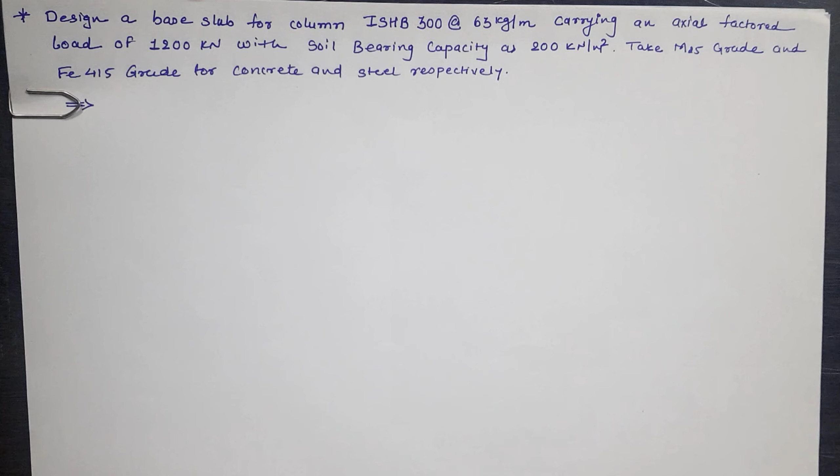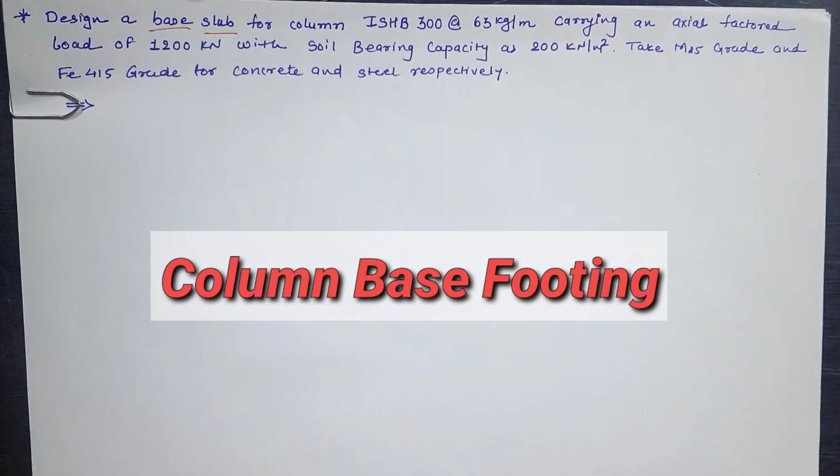Myself Ethan Kenny, and today we are going to learn about base slab footing for given Indian standard heavy beam 300. We have given axial factored load as 1200 kilonewton and SBC of soil, it means soil bearing capacity, as 200 kilonewton per meter square.

Another part is given as the grade of the concrete as M25 as well as grade of the steel as Fe415. So first of all, what is the base slab?

Generally we are going to use the concrete footing for any types of structure. So the footing is of concrete. We have given Indian standard heavy beam 300 as a column. It means that our column is of steel.

So we cannot directly connect this steel material with the concrete via welding or bolted, and for connection of this steel column to the footing, we have to apply base plate of steel material to the concrete, and this base plate is directly connected to concrete via anchor bolt all around the periphery.

So that base plate is directly connected to the concrete footing, and the steel section, or we can say that the column, is connected to this base plate via welding or bolted. So this is known as the column base footing.

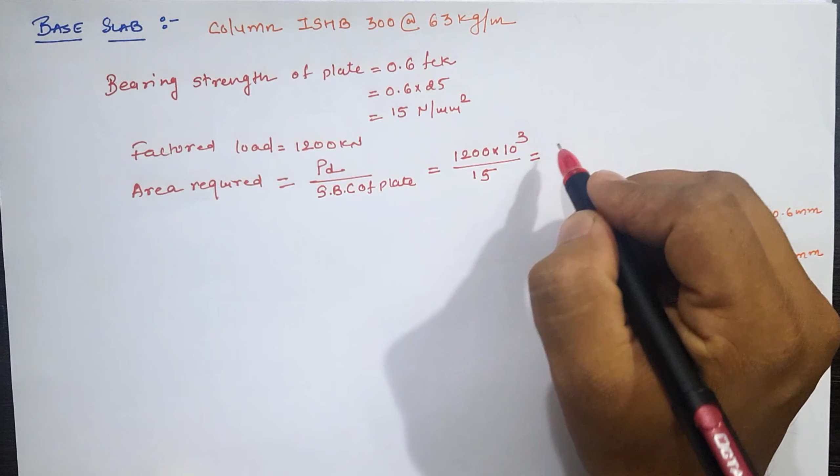Now we have given 1200 kilonewton as a design load. In terms of Newton, it is 1200 into 10 raised to 3, and bearing strength, it means safe bearing capacity of plate, which is equal to 15. It is 80,000 mm square. So we have to provide the base plate having minimum area as 80,000 mm square.

Now we know that our plan view of the Indian standard heavy beam section is width as 250 and depth as 300. So we can provide 250 by 300 mm as a base plate, but if we calculate the area, then 250 cross 300 is less than 80,000 mm square. So we have to increase the dimension.

So let us assume 50 mm as a projection all over the periphery of the section. Hence the width of plate, B of plate, is equal to our base width of the flange BF plus 2 times our assumed projection, which we have assumed as 50 mm. So width of flange is equal to 250 plus 100, which is equal to 350 mm.

Similarly, depth of plate is our height plus 2 times 50 as a projection. It means that 300 plus 100, 400 mm. Now area of plate is equal to 350 cross 400, which is equal to 1,40,000 mm square, which is greater than 80,000.

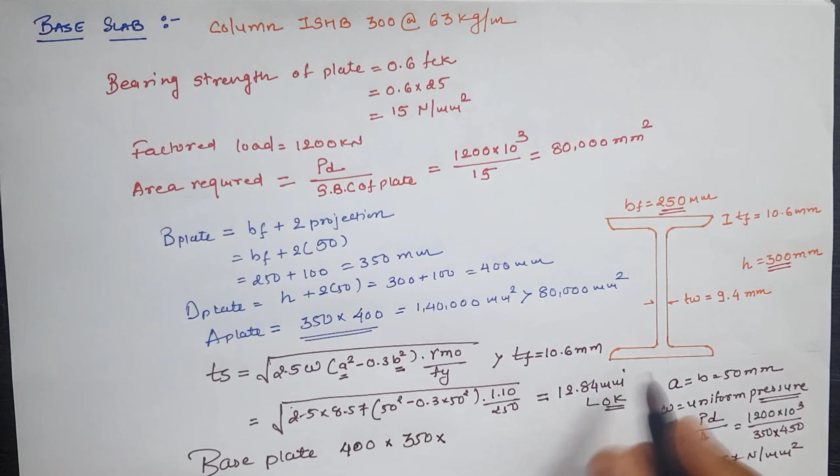So our base plate is 400 cross 350 cross, let us assume 14 mm as a thick. So the base plate is 400 mm cross 350 mm cross 14 mm.

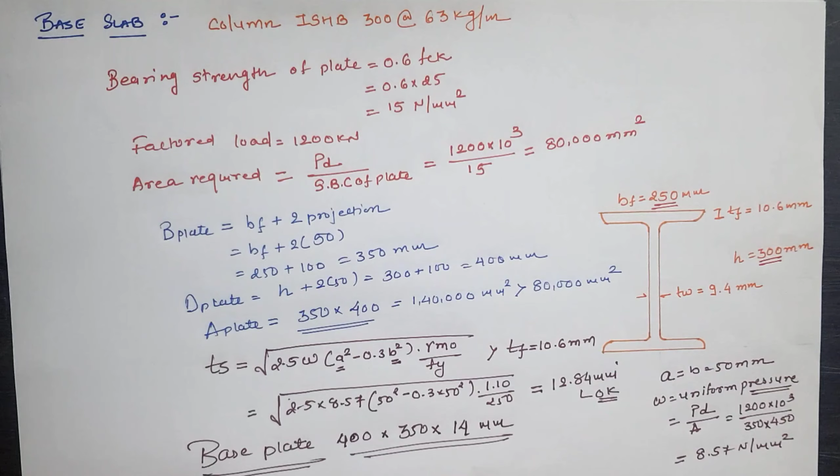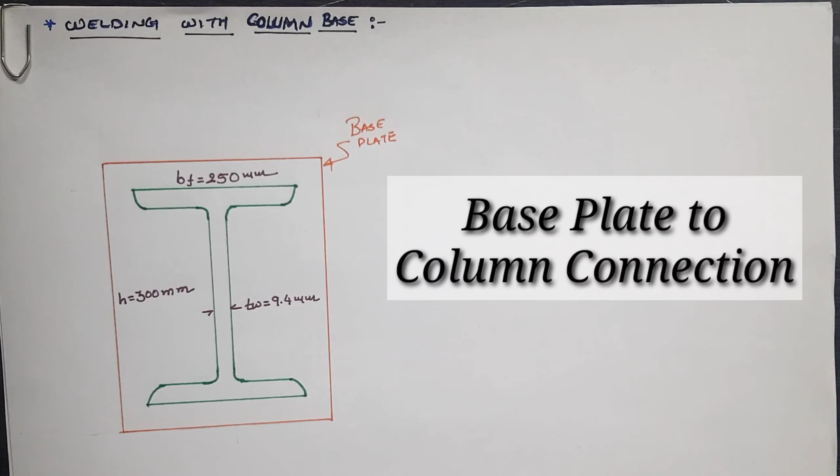Now let us calculate the connection of this base plate to the Indian Standard heavy beam. Now going for the connection of column base to the given column. Now we are going to assume the welding with the base plate.

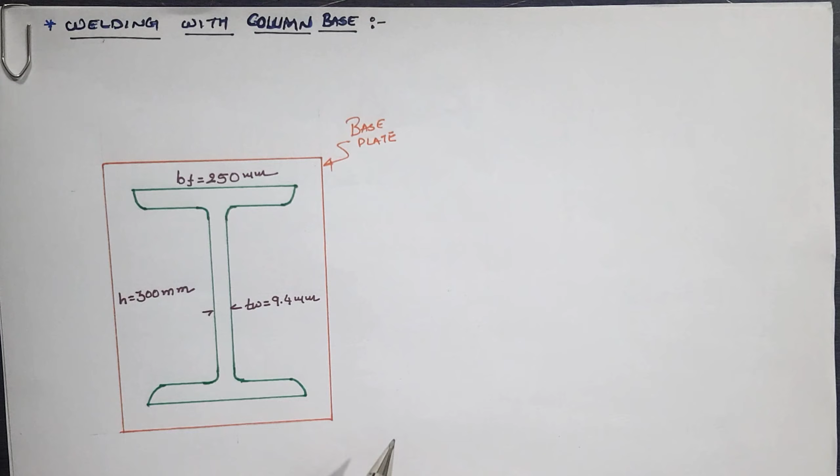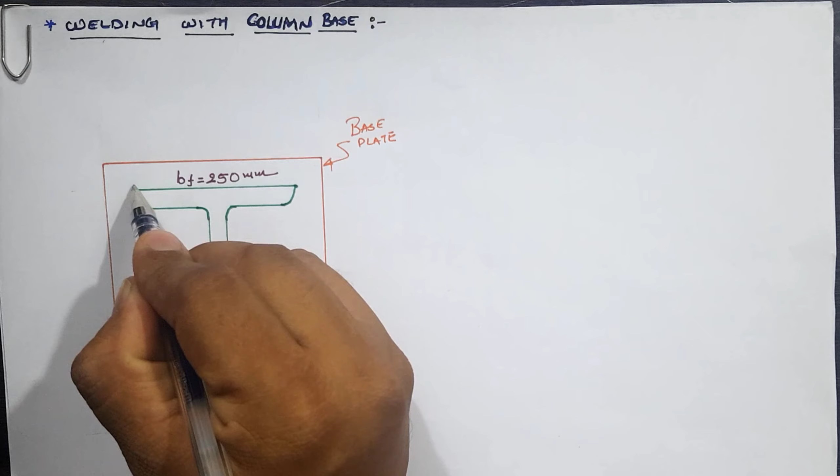First of all, we have to know the available length which can be welded of given Indian Standard heavy beam. So observing the figure, we have the peripheral view as the width of top flange as well as bottom flange.

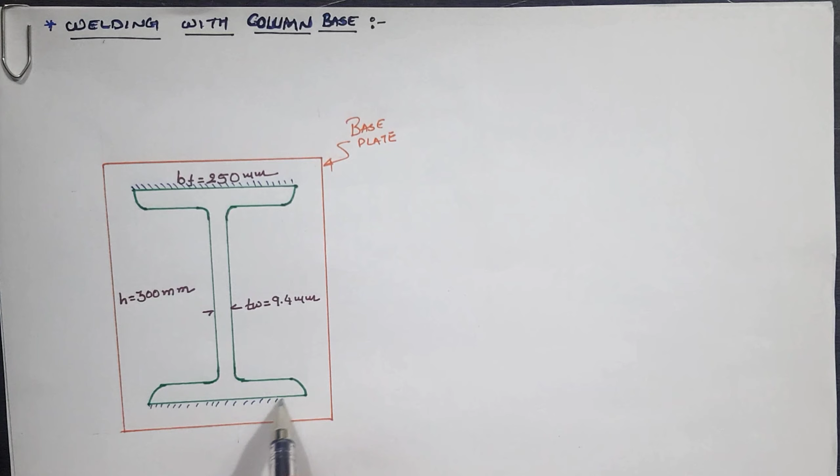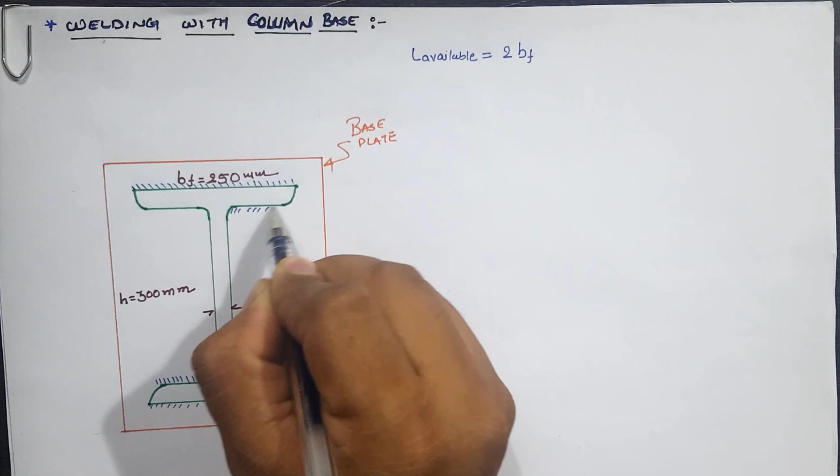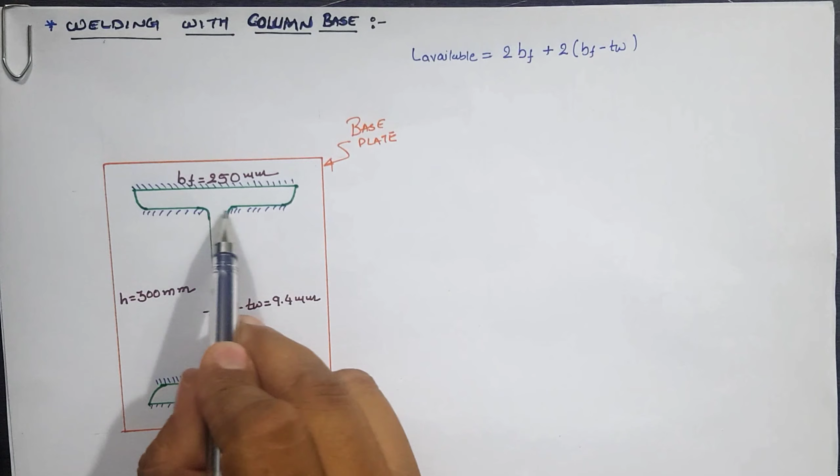So length available is equal to 2 times width of flange at top and bottom, as well as the length of inner part of the flange on top and bottom, which is equal to 2 times BF minus TW, because of the thickness of web is vertical plus.

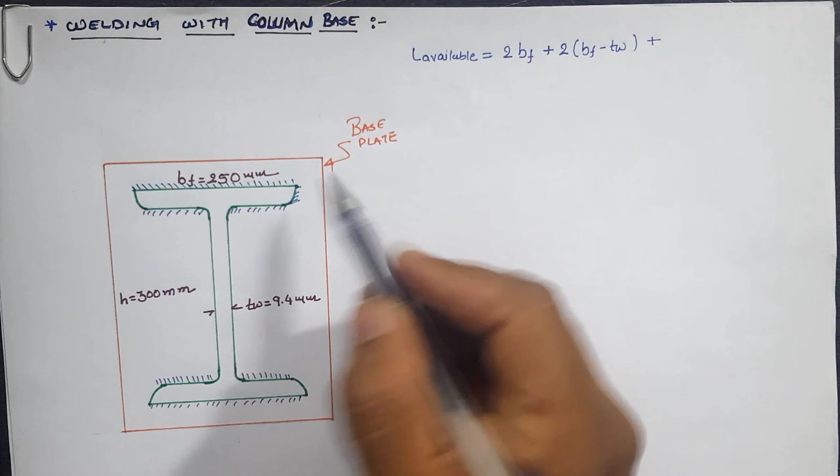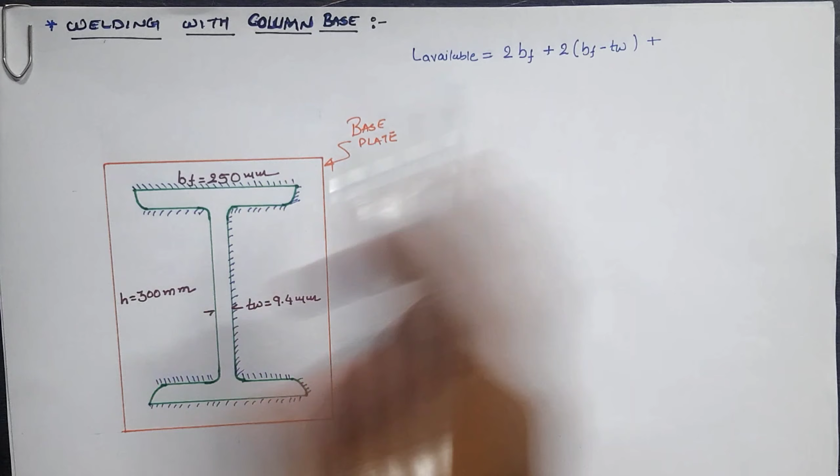Now taking the vertical direction, so this value is as TF as well as the depth of the web on the right side. So TF plus D again plus TF, and if you observe the figure, this value is our overall height. It means it is 2 times the height at left hand side as well as the right side of the section.

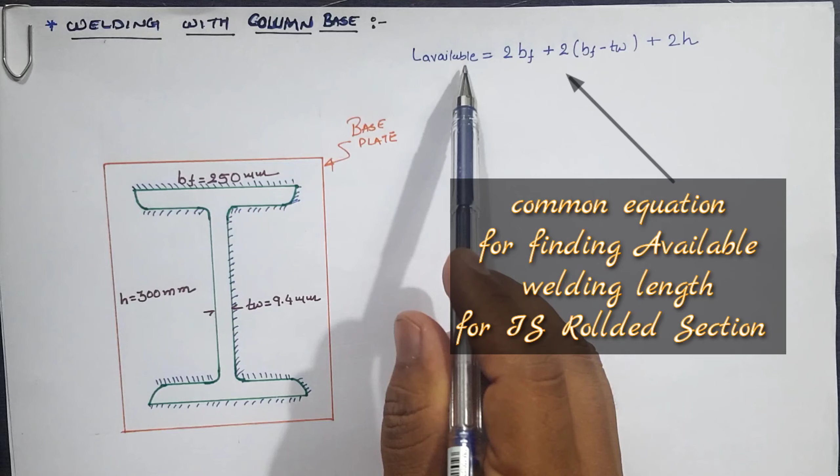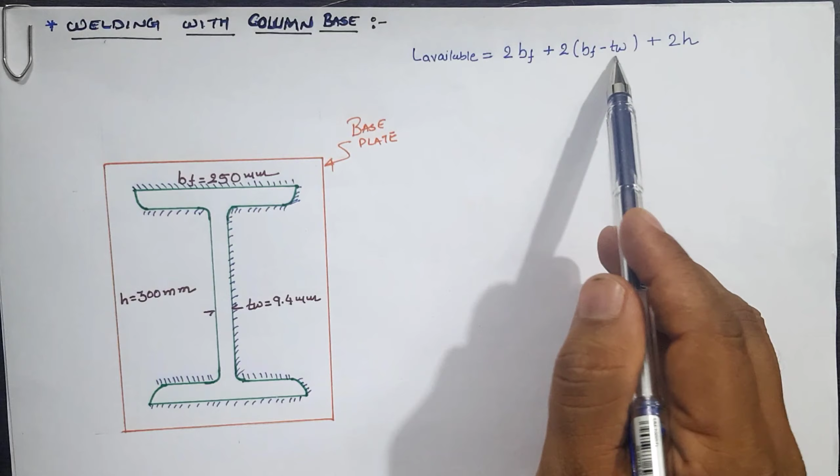Length available for the welding of any Indian Standard rolled beam section is 2 times BF plus 2 times BF minus TW plus 2H, where BF is equal to width of flange, TW is thickness of web, and H is equal to overall height.

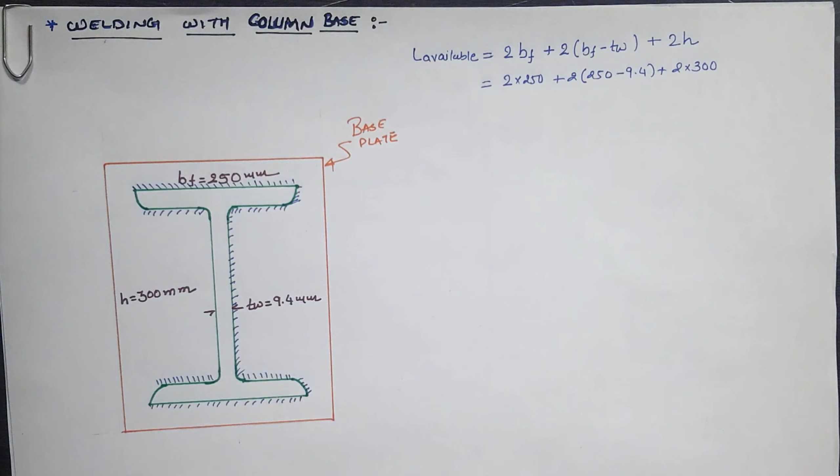Which is equal to 1581.2 mm. It means that our available length is 1581.2 mm.

Now let us calculate the welded required length. For that we have to assume size of weld. Now let us assume size of weld as 6 mm thick. Also the shop weld, and for shop weld FWD, it means design weld strength, is 189 Newton per mm square.

Now according to the size of weld, we can find out the throat thickness. So from size of weld we can find out the throat thickness. So 0.7 into 6, which is equal to 4.2 mm.

Now according to the Indian Standard 800, our equation is FWD, which is equal to load divided by length of weld into throat thickness. So length of weld is equal to load divided by design strength into throat thickness.

Which is equal to 1511.72 mm, which is less than 1581.2 mm, which is our available length. So we can provide the welding all around the column to connect the column section to the base plate.

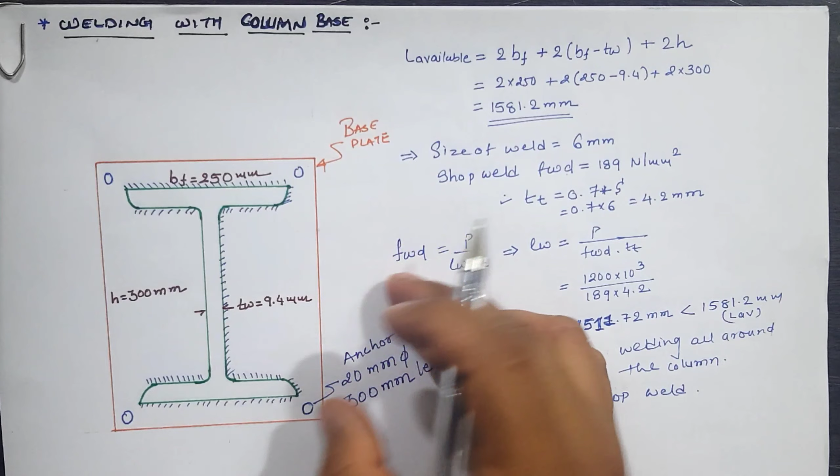Now let us go for the calculation of area of concrete block. For the size of concrete block, our Indian Standard Heavy Beam section as a column is connected to

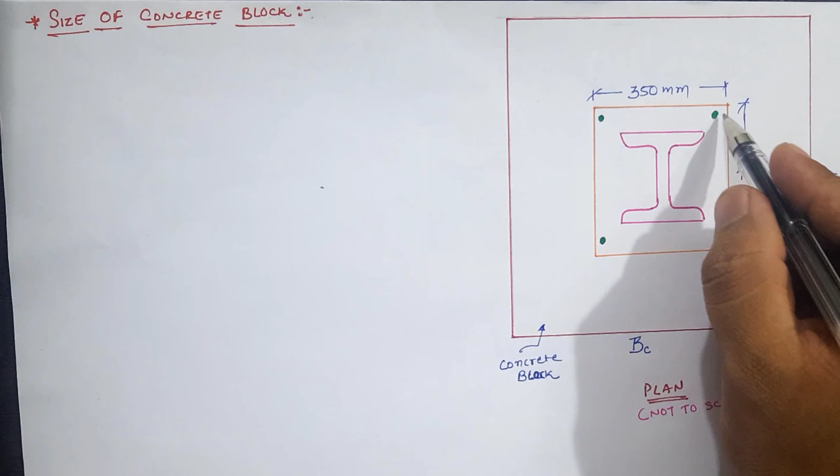the base plate via all-around welding of 6 mm thick shop weld, and this base plate is connected to the concrete block via 20 mm dia anchor bolts having a length of 300 mm in the concrete block.

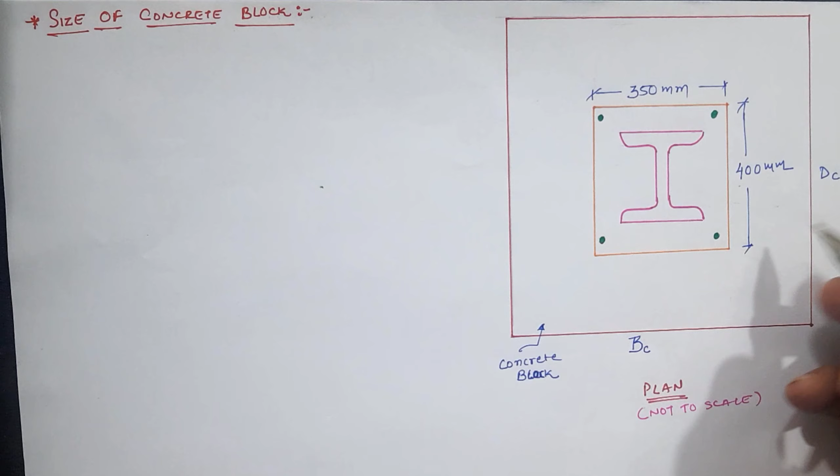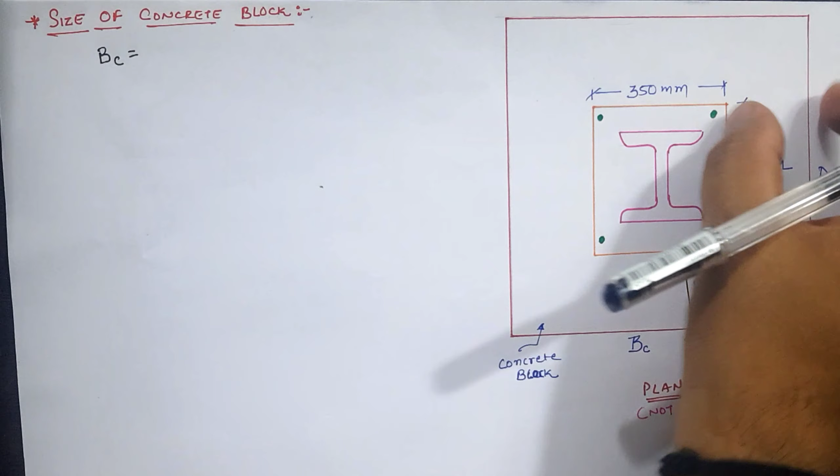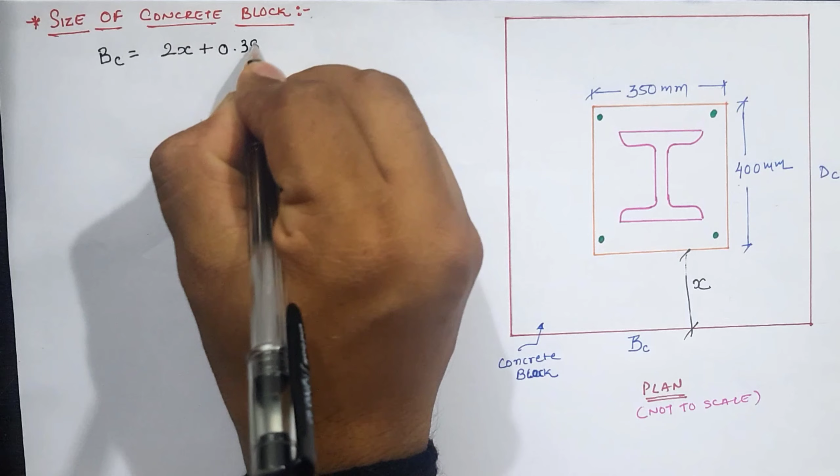Now we know that our base plate size is 350 mm by 400 mm by 14 mm thick. If we provide x as the dimension of projection all around the periphery of the base plate, then our required concrete block width is 350 mm plus 2x. It means 2 times x plus 350, in terms of mm, so let us calculate the value in terms of meter: 2x plus 0.35 meter.

Similarly, depth of the concrete block is 2x plus 0.4 in terms of meter. So we have to provide area as BC cross DC, width of the concrete block into depth of the concrete block. Now we know that the concrete block is generally designed for the working load, and we have given the factor load

as 1200 kilonewton. It means that our working load is equal to factor load divided by factor of safety, and our factor load is 1200 kilonewton and factor of safety is generally taken as 1.5. It means that our working load is 800 kilonewton, as well as the concrete block self weight

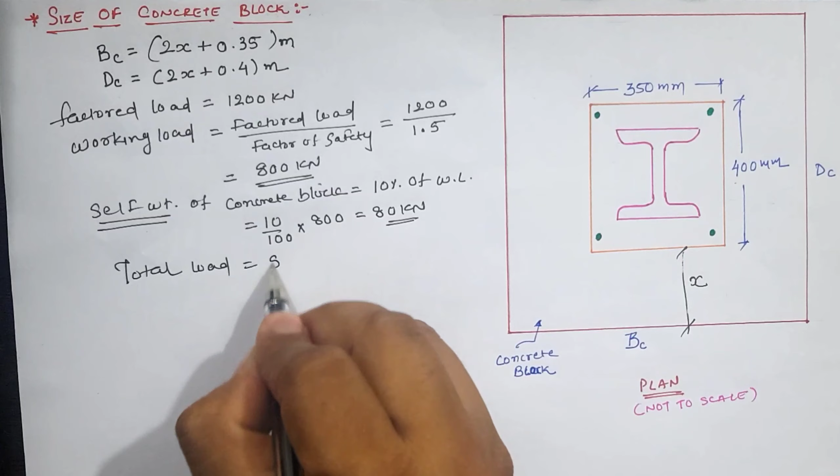is generally taken as 10% of the working load. It means 10/100 into 800, which is equal to 80 kilonewton as self weight. So total load is equal to 800 kilonewton as working load plus 80 kilonewton as self weight.

So total load is 880 kilonewton on the concrete block. So we have to design the concrete block according to the 880 kilonewton load. Now we have given SBC of soil, safe bearing capacity, as 200 kilonewton per meter square. It means that area required is equal to load divided by SBC.

Load is 880 kilonewton divided by 200 kilonewton per meter square. So total area required is nothing but 4.4 meter square. We have to provide area of block as 4.4 meter square.

Now we assume x meter as the projection. It means the area of concrete block is the multiplication of width of the concrete block as well as depth of the concrete block. So 4.4 is equal to BC cross DC, which is equal to (2x plus 0.35) into (2x plus 0.4), which is equal to